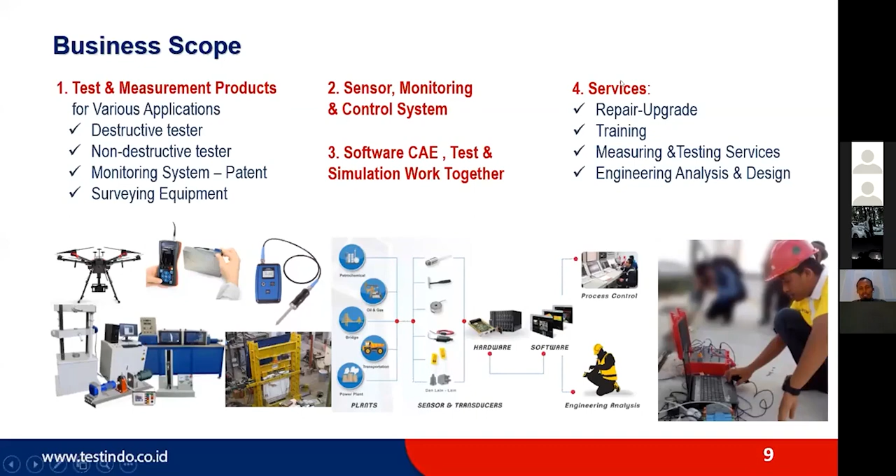Dan untuk services kita ada jasa untuk testing seperti produk laser scanner, non-destructive testing, dan juga kita ada analisis dan training. Dan kita juga banyak mensolusikan problem-problem struktur di Indonesia. Manpower kita ada civil engineering, ada instrument engineer sama mechanical engineering.

Nah, main market kita selama ini kita banyak di PU, memang di Bina Marga, di Kementerian Teknik, di balai-balai. Dan kami juga rutin mensupport komisi di Kementerian PU, Komisi Keselamatan Jembatan dan Terowongan Jalan, dan juga kita inisiator asosiasi untuk masyarakat monitoring kesehatan struktur Indonesia.

Sedangkan hubungan kami dengan ACS dan Leica ini, ACS adalah prinsipal dari Testindo, dan Leica kita adalah sistem integrator, kita provide solution untuk produk-produk Leica. Jadi beberapa customer Leica mungkin, Leica ini punya range produk cukup luas, kita engineer-nya yang support untuk integrasinya.

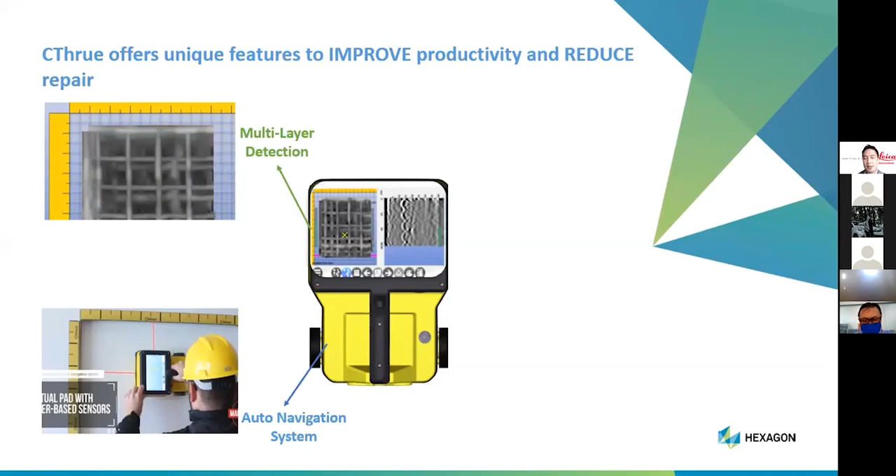Saya masuk ke fitur-fitur unggulan dari CThrue ini. Karena dual antena yang dimilikinya, ini visualisasi yang dapat diberikan oleh CThrue, jadi dia nggak hanya memberikan first layer atau second layer, bahkan dia memberikan sampai dengan layer-layer berikutnya yang di bawah. Lalu, dengan adanya automatic navigation system, kita nggak perlu lagi membuat grid pada saat kita mau melakukan grid scan, atau menggunakan kertas yang bergaris. Tapi dengan menggunakan virtual pad itu, kita dapat meningkatkan productivity kita bekerja, karena di sana akan diberikan guidance ke arah mana kita harus bergerak agar sejajar dengan gridnya.

Lalu apabila kita sudah melakukan scanning di area itu, dan kita besoknya atau 2 minggu lagi ada owner investigation contohnya, atau dengan konsultan perencana melakukan inspection, kita bisa membawa tablet tanpa perlu lagi membawa alat scannernya. Kita bawa tablet dan kita melihat hasil dari scanning kita itu real yang ada di lapangan dengan menggunakan tablet itu.

Fitur yang terakhir yaitu adalah embedded EM sensor atau electromagnetic sensor, di mana ini memungkinkan alat CThrue dalam mendeteksi adanya kabel listrik yang aktif. Jadi sangat memastikan apabila kita mau melakukan safety drilling dan kita ingin menghindari adanya luka pada kabel listrik kita yang aktif.

Untuk lebih jelas mengenai fitur utama, coba kita lihat mengenai multi-layer detection. Ini adalah tampilan layar CThrue pada saat kita melakukan data akuisisi. Dapat dilihat sebelah kiri ini adalah full screen dari layar monitornya CThrue. Ini bukan gabungan dari satu layar dan 2 layar, tapi ini adalah satu screen, dan dia menampilkan kiri dan kanan. Kirinya ini adalah deeper object yang dideteksi oleh dia, dan yang kanannya ini adalah shallow object yang dideteksi oleh dia. Deeper object dia akan memberikan informasi layer kedua sampai dengan layer-layer berikutnya yang ada di bawahnya itu dengan sangat jelas, tapi dia tidak memberikan informasi yang cukup jelas pada area-area atas. Tapi area-area atas diinformasikan kepada shallow object yang di sini. Jadi kita bisa mendapat 2 visualisasi pada saat yang bersamaan.

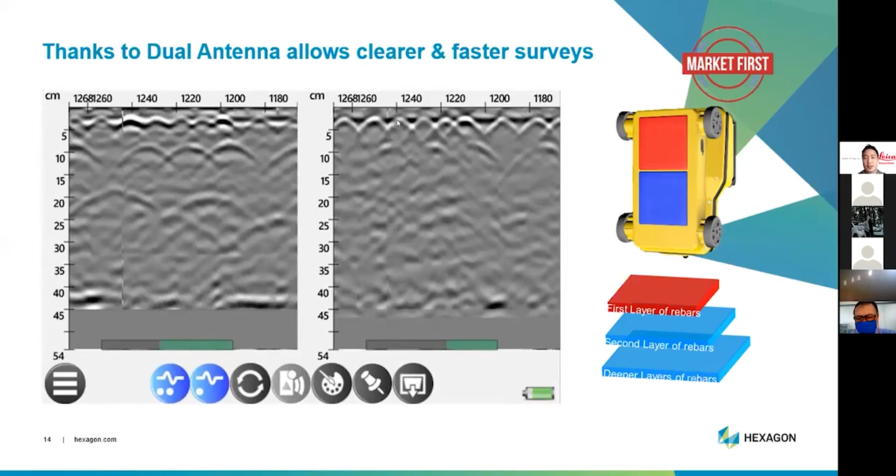Apabila kita melakukan grid scan, tampilannya yang dilihat seperti ini. Jadi kita dapat mengambil keputusan di area mana kita bisa melakukan safety drilling dan kita tidak menabrak besi, melukai besi, atau bahkan kita sampai memotong struktur bangunan yang ada di sana.

Contoh aplikasinya atau bagaimana kita menggunakan alat CThrue ini sendiri dapat dilihat di contoh berikut. Ini pada saat kita mau melakukan data acquisition, dan apabila kita mau mengintegrasikannya sampai dengan augmented reality, kita dapat menggunakan CThrue dengan virtual pad-nya sehingga kita dapat benefit, tidak perlu membuat grid terlebih dahulu, dia akan memberikan guidance kepada kita saat kita bekerja.

Lalu stiker ini akan berguna sebagai marking dan juga nantinya apabila Bapak Ibu balik ke lapangan dengan membawa tabletnya, cukup scan di area sana seperti barcode saja, kita dapat melihat hasil yang sudah kita scan sebelumnya dengan menggunakan alat scanner CThrue itu. Dan ini adalah gambar pada saat kita sudah melakukan data acquisition dan kita mau melakukan safety drilling. Di sini dapat dilihat dengan sangat jelas objek-objek yang tidak memiliki bentangan rebar, baik itu vertikal atau horizontal, adalah area yang tepat untuk kita lakukan safety drilling.

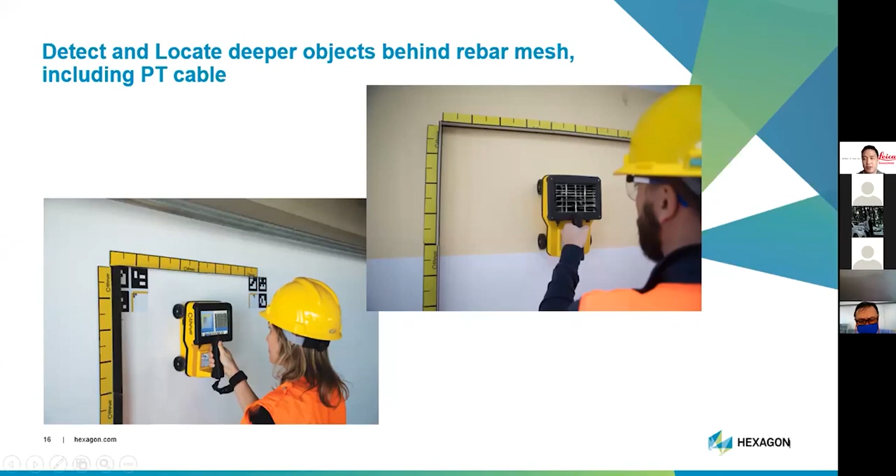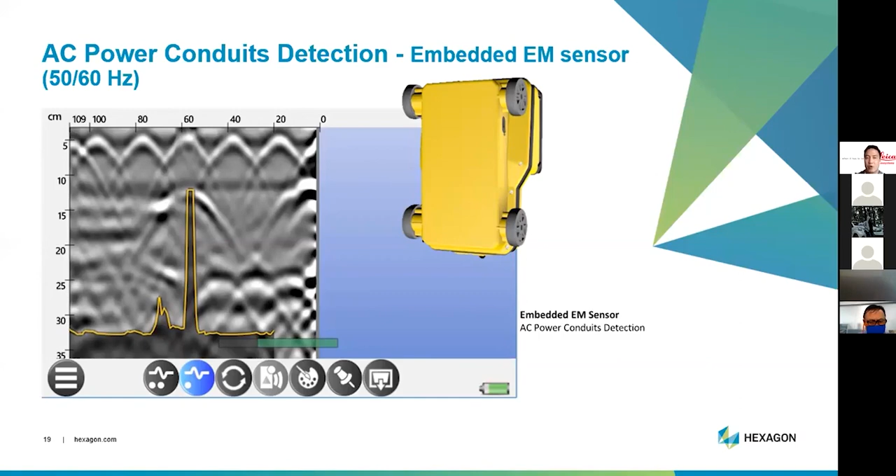Untuk embedded EM sensor itu sendiri, tampilannya adalah seperti ini. Jadi apabila kita mengaktifkan sensor ini, pada saat kita melakukan data akuisisi nanti akan bergerak apabila kita mendekati listrik yang bermuatan, itu akan bergerak kurvanya seperti itu, dan paling peak, paling atas itu mengindikasikan bahwa di area itu, di contoh ini adalah 60 cm dari inisial scanning area kita, itu ada suatu kabel listrik yang bermuatan dengan kedalaman sekitar 12,5 sampai dengan 13 cm. Selanjutnya kita bisa membuat marking di sana, dan juga setelah itu kita bisa menghindari area itu apabila kita tidak mau melukai kabel listrik tersebut.

Untuk fitur tambahan dari CThrue, apabila Bapak Ibu ingin melakukan investigasi di jembatan atau di area-area yang tinggi yang susah dicapai dengan tangan manusia, kita memiliki remote control di dalam stick ini, sehingga dapat menghubungkan dengan teman kita yang menggunakan tablet, sehingga beliau dapat melihat hasil scanning yang dilakukan oleh alat CThrue tersebut secara real di tablet.

Yang pertama yang perlu kita lakukan adalah kita membuat grid setup terlebih dahulu. Lalu setelah itu kita melakukan scanning atau data akuisisi vertikal dan horizontal di area yang kita bikin tadi.

Lalu dengan segera kita sudah mendapatkan hasil dari area yang kita akuisisi itu. Apabila Bapak Ibu hanya ingin melakukan safety drilling, contohnya, atau mau melakukan inspeksi di lapangan, di site, cukup berhenti sampai dengan tahapan mendapatkan result. Setelah itu bisa mengambil keputusan di sana, di saat itu juga.

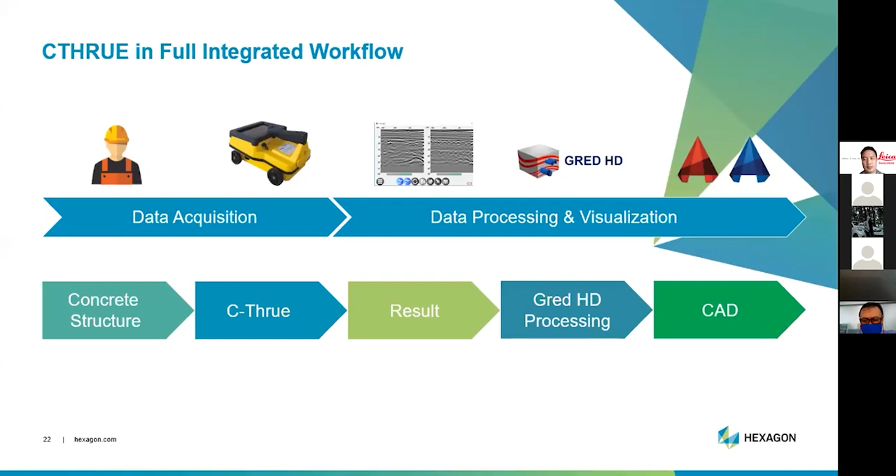Atau bahkan kalau misalkan Bapak Ibu ingin memindahkan hasil scanningnya itu ke berbagai macam drawing file, kita support dengan adanya software. Di tengah-tengahnya itu ada software GRED HD yang akan saya jelaskan nanti, seperti apa previewnya. Software ini akan membantu membuat hasil yang diberikan oleh si alat menjadi tampilan 3D, dan juga nanti kita bisa mengekspornya ke CAD drawing dan GIS file. Ini adalah preview sedikit tentang software GRED HD itu sendiri.

Jadi dari data yang kita akuisisi di lapangan, kita ekspor ke PC atau desktop kita yang memiliki software GRED HD ini. Lalu setelah itu kita melakukan post processing selanjutnya di sini, dan pada akhirnya kita bisa mendapatkan tampilan 3D dan kita bisa pindahkan ke CAD atau GIS.

Untuk lebih jelas kepada Bapak mengenai full CThrue workflow ini, saya akan sharing suatu video untuk memperlihatkan bagaimana CThrue ini bekerja sampai dengan tahap akhirnya dan hasilnya seperti apa. Silakan dilihat.

Tentunya main application-nya cuma dua tadi, yaitu inspection dan safety drilling. Dan ini beberapa adalah contoh-contoh aplikasi yang saya bisa share hari ini kepada Bapak Ibu.

Yang pertama adalah as-built check. Pada umumnya apabila kita memiliki bangunan-bangunan lama yang mau kita melakukan renovasi atau perkuatan, sangat tepat kita menggunakan solusi dari sini. Contoh di sini adalah suatu jembatan yang ada di Itali, dibangun sewaktu Perang Dunia Kedua. Dia sudah memiliki drawing, untungnya, dan dia mau mengecek apakah dengan struktur bangunan yang seperti ini bentuknya masih layak digunakan dan konfigurasi yang ada masih sesuai dengan drawing awal atau tidak.

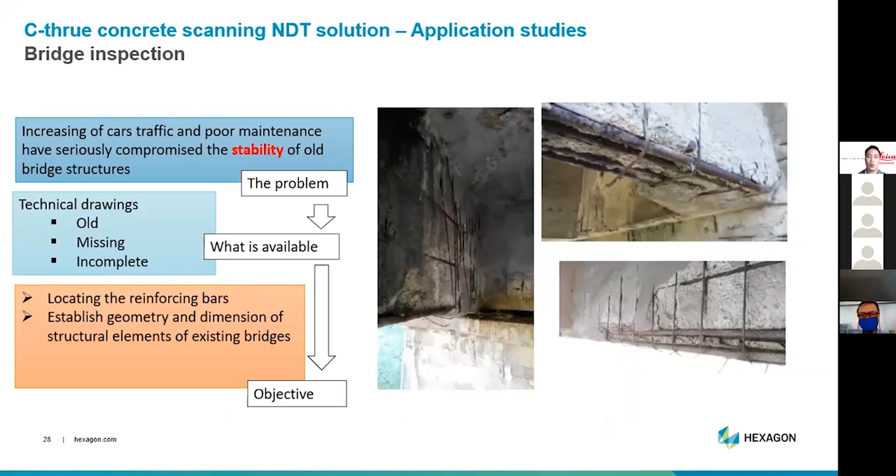Yang dilakukan setelah dia selesai drawing, kalau Bapak Ibu lihat di gambar awal, kita bagi per subsegmen, jadi P1 sampai dengan P8, masing-masing gambar dari hasil scanning itu kita cocokkan kepada gambar, dan hasil scanning itu menunjukkan bahwa hasilnya masih sesuai dengan aktual yang ada di lapangan.

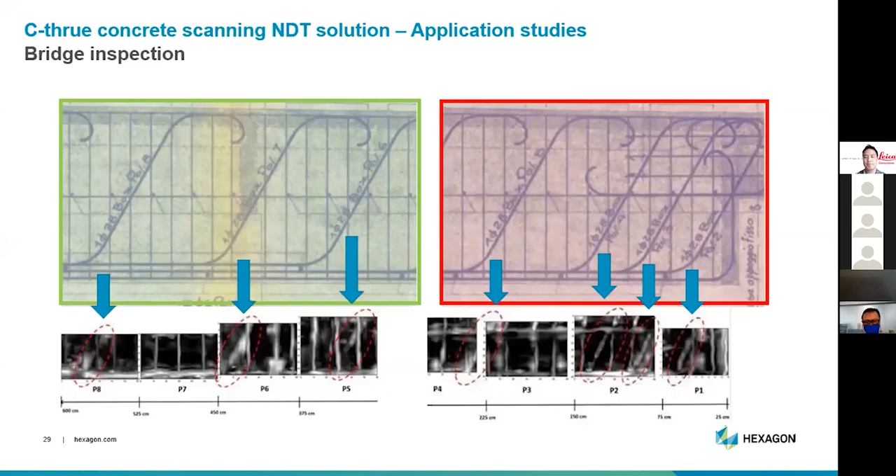Contoh selanjutnya, atau main application selanjutnya, tentunya adalah rebar detection. Apabila kita mau melakukan investigasi untuk bangunan kolom, misalkan bangunan lama kita atau pada perubahan fungsi bangunan, kita ingin melakukan pembesaran kolom, kita bisa melakukan investigasi terlebih dahulu struktur bangunan seperti apa apabila kita tidak memiliki blueprint. Atau kalau misalnya kita mau melakukan safety drilling atau coring, kita juga bisa menggunakan solusi dari Leica ini.

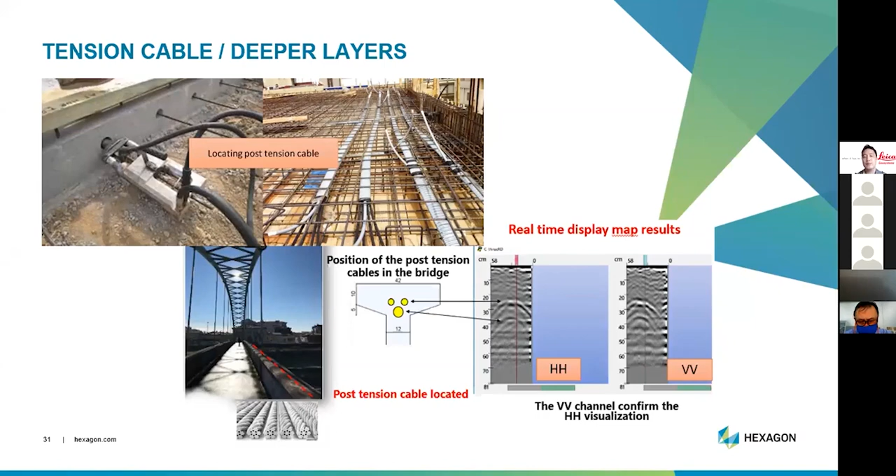Yang selanjutnya, contoh yang cukup menarik, apabila Bapak Ibu ingin melakukan investigasi suatu jembatan dan posisi dari post tension-nya itu dibentang atau digelar secara horizontal sejajar dengan jembatannya, dan dia berada di atas dari rebar. Pada contoh ini, jembatannya cukup ramai dilalui oleh kendaraan, dan kita mau melihat visualisasinya dari bawah.

Dan dari visualisasi dengan C-thrue, kita memberikan dua informasi karena dual antena polarization tersebut, kita dapat mendapatkan informasi tentang objek yang shallow dan yang deep seperti apa. Sehingga dengan demikian kita dapat melakukan interpretasi data yang dibaca, apakah itu rebar atau post tension cable.

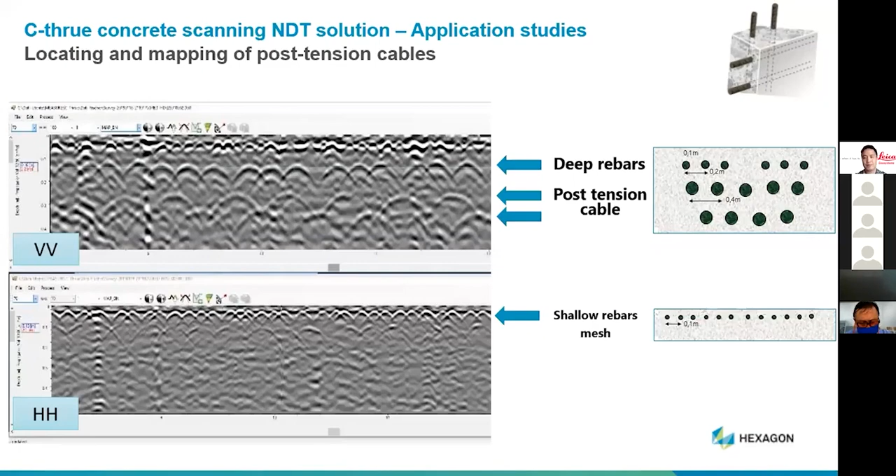Dan ini adalah contoh apabila kita mau melakukan safety drilling atau safety coring. Tentunya fitur utama adalah multi-layer interpretation, kita dapat melihat di lapangan dan melakukan marking di area-area mana yang tidak memiliki besi, sehingga kita memastikan tidak merusak besi tulangan yang ada di dalam beton.

Lalu selanjutnya fitur atau aplikasi terakhir yang bisa saya sharing hari ini adalah apabila sewaktu melakukan scanning, kita menemukan adanya suatu anomali. Anomali ini dapat kita detect secara otomatis dengan menggunakan tombol pin ini. Kita klik di sini, lalu kita arahkan kepada hiperbola tersebut, dan nanti akan memberikan informasi, kalau warnanya hijau seperti di gambar itu adalah void.

Sehingga apabila beton yang dideteksi itu memiliki rongga—bukan rongga-rongga kecil atau crack kecil, tapi rongga yang cukup besar—itu bisa diinformasikan kepada Bapak Ibu sewaktu melakukan scanning dengan menggunakan alat C-thrue.

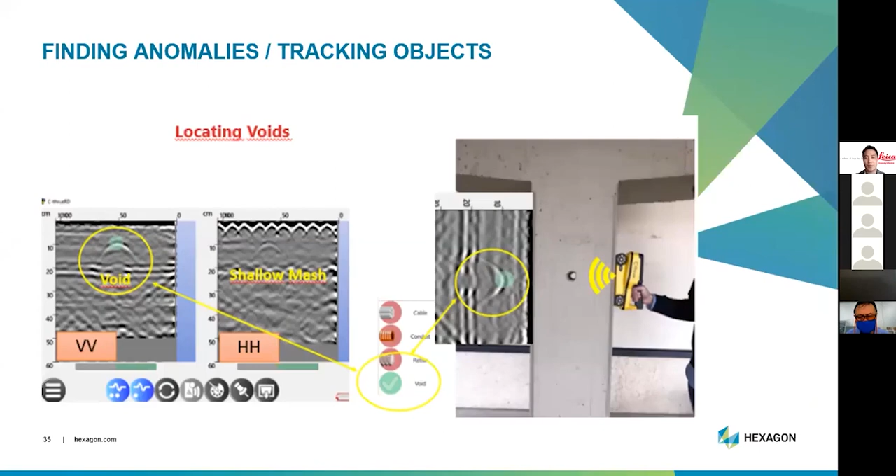Oke, saya sudah sampai di akhir slide presentasi saya hari ini, Bapak Ibu. Cukup padat, cukup singkat presentasi dari saya, karena waktunya pun juga cukup singkat. Semoga Bapak Ibu melihat benefit yang bisa diperoleh dengan menggunakan solusi dari kami. Untuk mengakhiri, izinkan saya untuk merecall atau merecap beberapa fitur yang dimiliki oleh alat ini.

Kita menawarkan 3 first teknologi yang ada di market. Yang pertama, dengan adanya dual antena polarization, kita bisa mendapatkan visualisasi multi-layers yang ada di dalam suatu struktur bangunan. Lalu kita tidak perlu lagi menggunakan garis yang full.

Atau kita menggunakan kertas yang memiliki garis. Kita cukup melakukan dengan menggunakan virtual pad, dan kita bisa mendapatkan guidance ke arah mana kita bergerak di area itu.

Lalu juga dengan augmented reality, kapanpun kita melakukan investigasi atau inspection bersama dengan stakeholders yang lain, kita cukup membawa tablet dan kembali ke lapangan melihat area yang sudah kita scan dengan menggunakan tablet, sehingga pengambilan keputusan, contohnya di area yang kritikal, bersama dengan stakeholders yang lainnya itu dapat berlangsung dengan cepat dan sangat objektif.

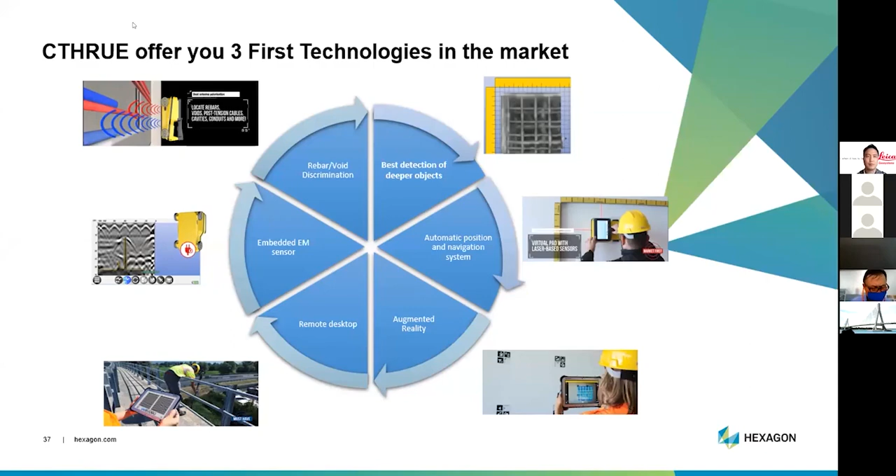My name is Andrey Bulavinov. I'm a CEO and Managing Director of ACS Germany. First, I will start with the introduction of the ACS group. ACS means Acoustic Control Systems, and from the name itself you see that we are concentrated on acoustic or ultrasonic testing methods.

A few words about the company. ACS has been started nearly 30 years back, and nowadays it is an international provider of UT equipment and inspection services as well, with about 160 employees and all in-house development and production of ultrasonic transducers, electronics, mechanics, software. We consider ourselves as pioneers in three-dimensional ultrasonic imaging, which I will exemplify in scope of my presentation.

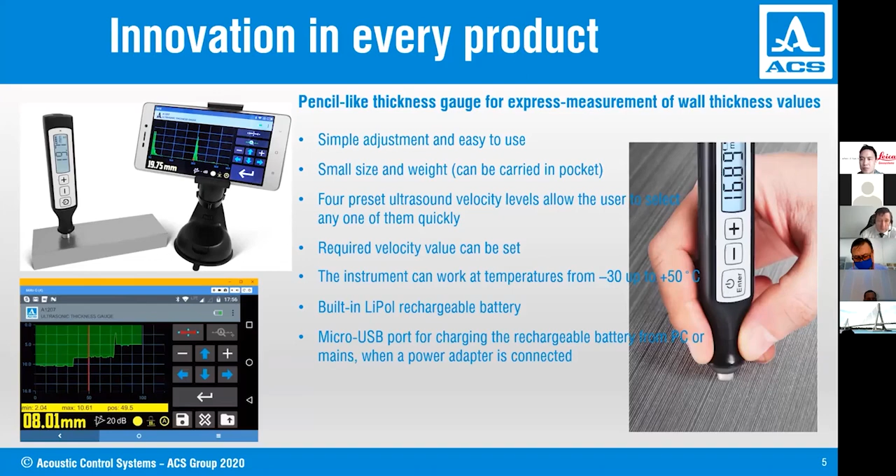A few products to indicate the novelty and innovation of ACS Group. For example, this is the world's smallest wall thickness gauge, with only 40 gram weight and direct link to the smartphone or tablet PC. Very easy to use and a fancy instrument with unique features, obviously. Then we have the EMAT thickness gauge.

People who are involved in UT, they know what is EMAT. It is another method to generate and receive ultrasonic waves. Opposite to other instruments available on the market, we don't use permanent magnets in our EMAT thickness gauge, implementing pulse magnetization, so that the instrument has a very unique feature. It is not sticking on the surface, meaning you really can scan and also obtain the B-scan, for example, without couplant.

There is a special version of this unit for working on high temperatures, up to 800 to 900 degrees Celsius. So the next one, very briefly, it is the world's smallest TFM, total focusing method, phased array instrument, which can be really held in one hand only, and at the same time can be connected to a small pipe scanner, so that two-dimensional and three-dimensional imaging is possible with very teeny dimensions of the unit.

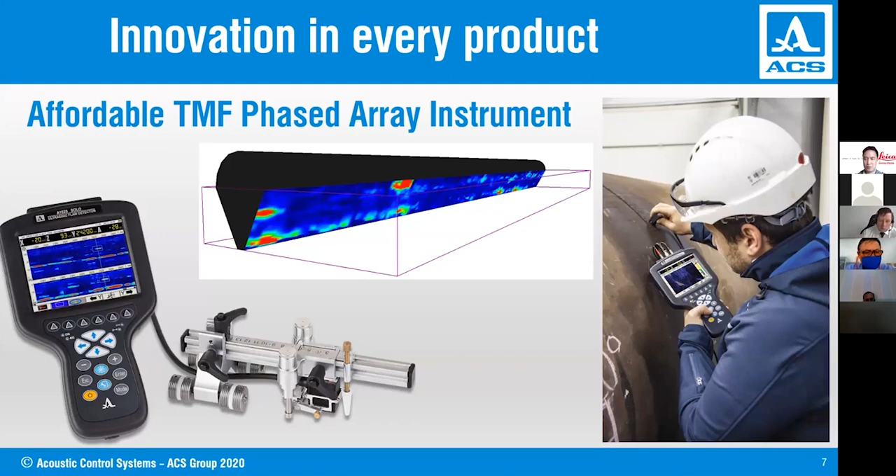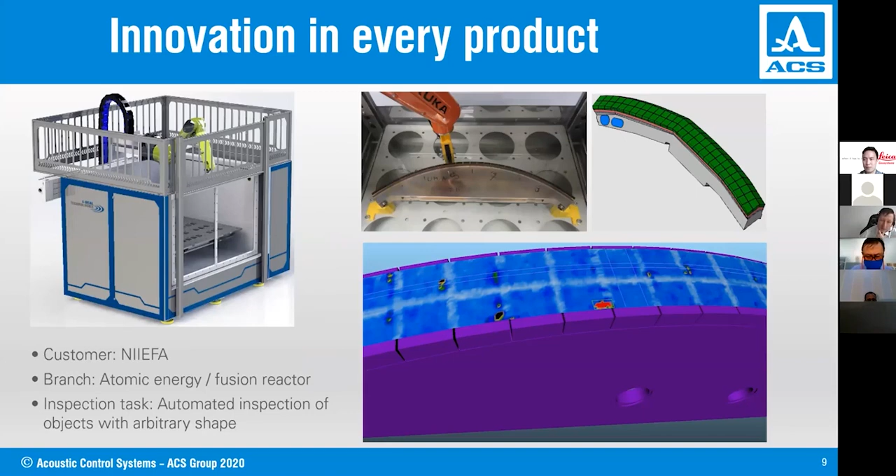Another instrument is again a high-end machine for ultrasonic testing of complex shaped parts by using articulated robots, with the functionality of two-dimensional and three-dimensional imaging directly on the CAD model of the component, with fully automatic detection and sizing of the material flaws. Another machine is an automated inspection setup for testing fuel tanks of rockets, which has been developed for the European EADS concern.

It is also a quite unique machine capable of three-dimensional imaging of really large objects, like a fuel tank made of carbon fiber, which is a lightweight material.

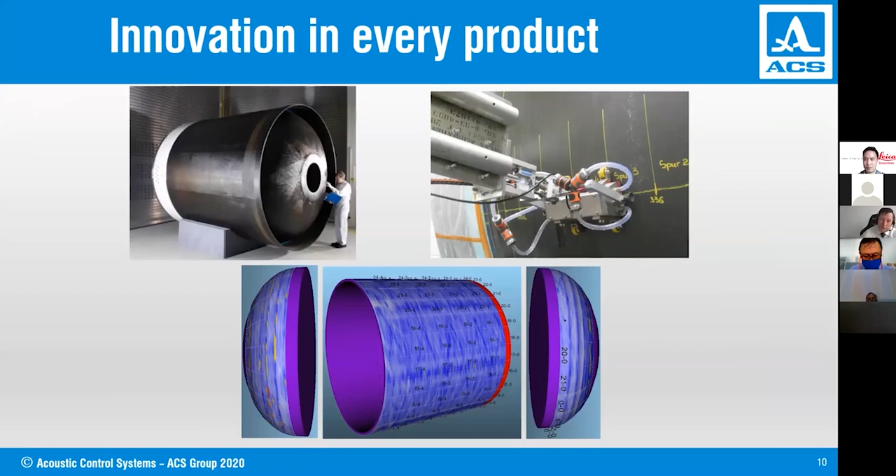Here I am at the end of the introduction of the ACS group. If you have any questions apart from concrete testing, we can discuss it later, or maybe make another session. But now I'm coming to the actual topic of the webinar, and we'll talk about concrete testing in civil engineering - about the state of the art and available instrumentation for this purpose.

Generally speaking about what can be done by using UT, ultrasonic testing, in civil engineering - yes, we can collect data about the inner structure of the object. We can estimate the current state of the building or construction, and we can find and estimate the level of damages, material voids, and evaluate material flaws that appear during construction or during exploitation.

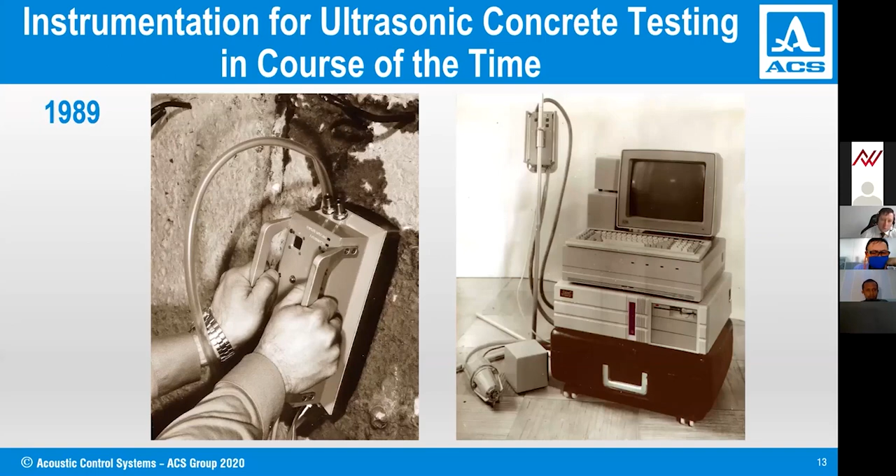ACS is obviously a pioneer in this field, especially if we talk about 2D and 3D imaging. The history started long back, and in the course of time the instruments have significantly changed. Nowadays you will see that these are very modern units with 3D imaging and evaluation of the inspection results available in the package.

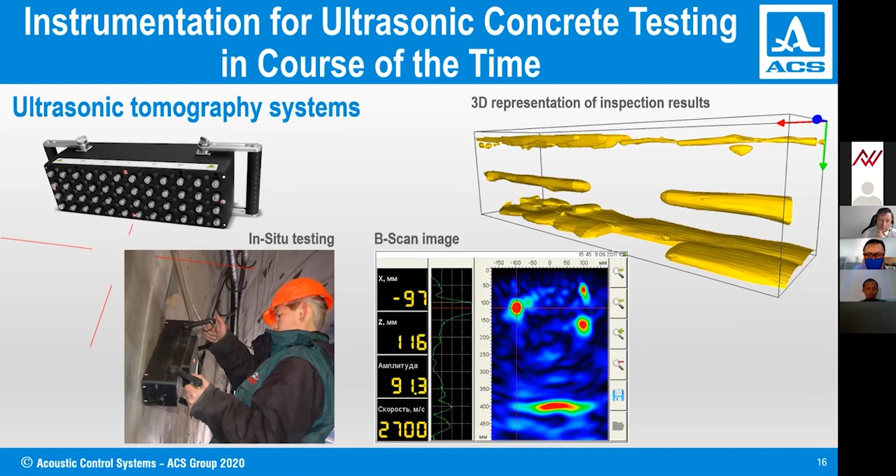But if we talk not only about the advantages, but rather about the challenges of UT on concrete, we should be very clear. There are basic limitations, and they are of two natures. The first group we can call physical limitations. For example, concrete is a very heterogeneous material with strong structural noise, and it is structurally complex.

It contains reinforcement rebars, tendon ducts, channels, and so on inside of the construction. We have to deal with the large dimensions of the objects, and sometimes it has limited accessibility. So all of this, of course, makes the life of the operator hard.

But another group of limitations - if you look at regular metal testing, we have three basics which help very much to perform. First of all, these are codes for instrumentation. Second, these are codes for personnel qualification. And third, these are codes and standards for actually performing on particular objects, like codes for weld inspection, forging inspection, or casting inspection, inspection of casting parts or carbon fiber.

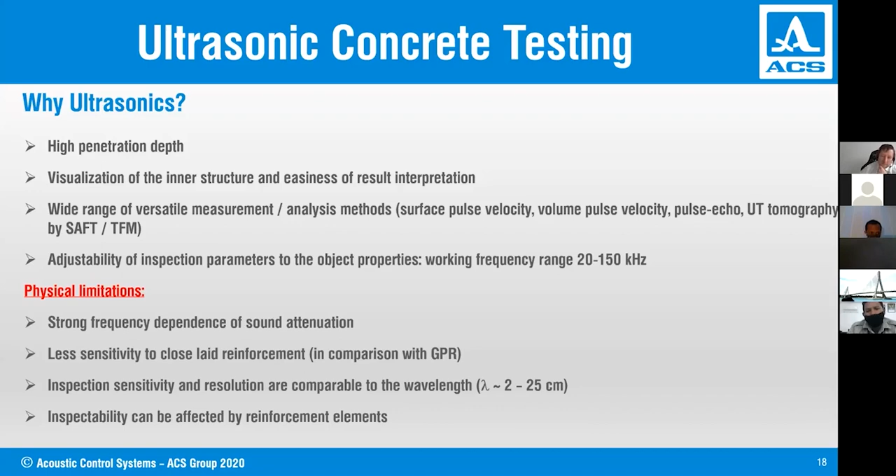And inspectability, especially if we talk about void detection, is very much affected by the presence of reinforcements inside of those components to be inspected.

So coming to the instrumentation, the key element of modern ultrasonic equipment is the so-called dry point contact transducers, DPC. We are proud to mention that ACS was the inventor of this technology. Those transducers can be configured and built in very different configurations with different frequencies.

But the basic thing to know is that by means of these pins vibrating on the surface, transducers are capable of generating either shear waves or longitudinal waves, and both of them can be applied for different applications, and as I mentioned, in a different frequency range.

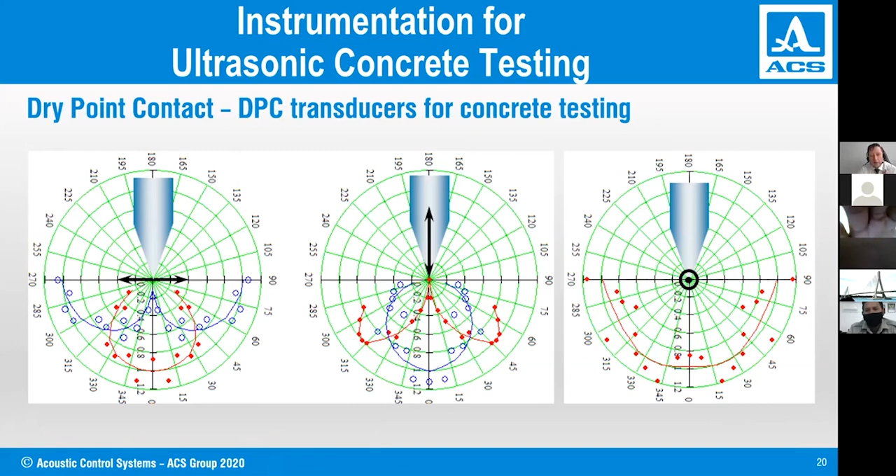Typically transducers have a very wide beam opening, predestined for tomographic processing of the ultrasonic data. Also, we very rarely use single pin or single element transducers due to limited penetration depth. Normally they are combined in different configurations of transducer arrays, used as a single aperture transducer, double aperture transducer, or phased array transducer, depending on the particular application.

The functionality of those instruments for ultrasonic testing of concrete can be subdivided roughly into 3 groups. First of all, these are ultrasonic pulse velocity testers, UPVT instruments. There are very many, this is a very widely applied technique, and it is quite simple to use. There are codes also on how to perform on site and obtain the proper results. Then the second group, these are single channel flaw detectors or thickness gauges, depending. And there are multi-channel tomography systems for imaging, like our MIRA instrument.

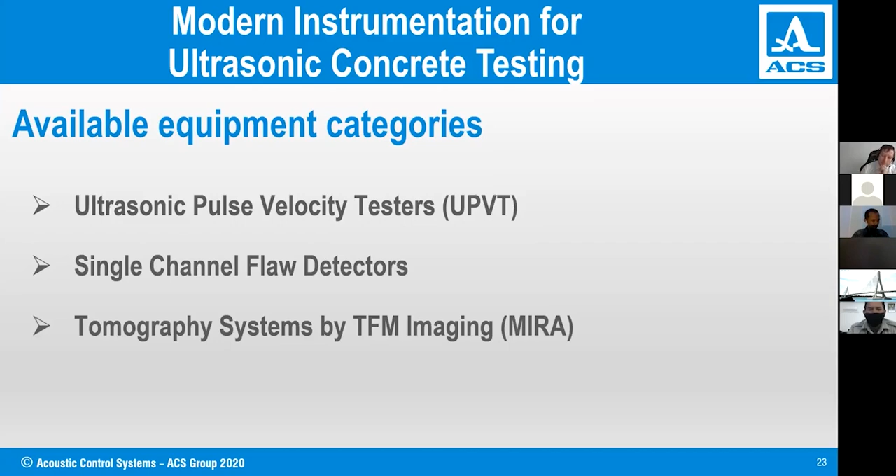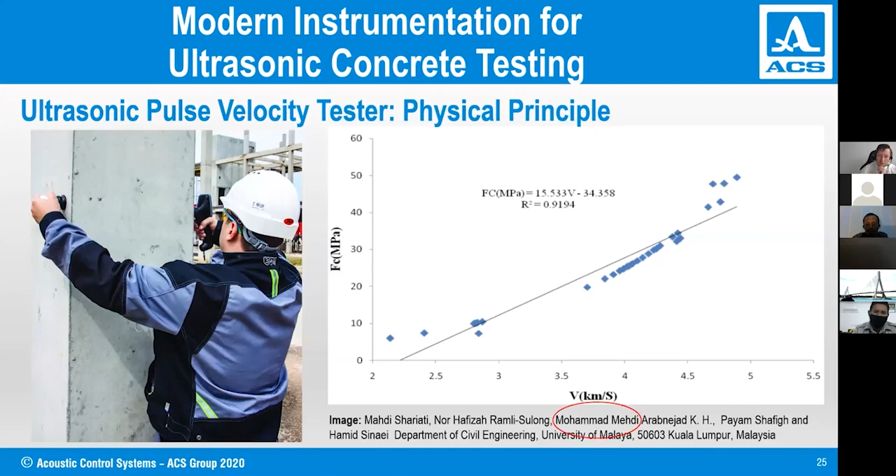UPVT testing is, as I've told, rather simple. By principle, we just measure the propagation time between the transmitter and receiver. By knowing the thickness of the component, we can calculate the sound velocity. The sound velocity correlates to compressive strength of the material, which is the basic mechanical characteristic for concrete. This dependency is general, but if we want to measure the compressive strength of concrete directly in megapascals, it needs calibration, because ultrasonic testing is never a direct measurement method, it is always an indirect measurement method. In all cases, we have to convert the UT values into mechanical values.

For example, if we are in a position to create calibration blocks of the same concrete type but with different mechanical characteristics, we can measure its mechanical properties and ultrasonic properties and their correspondence to each other. By having this curve, which can be saved in the instrument, we can directly indicate the mechanical property like compressive strength on the screen of the instrument.

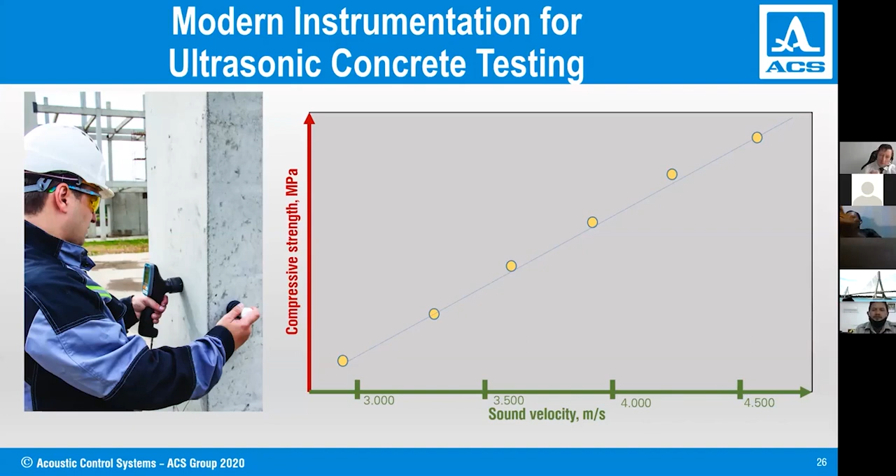There are different modes of measurement: so-called direct through transmission, semi-direct through transmission by side, by receiving the ultrasonic waves on site, and surface through transmission method. All those 3 methods are implemented, for example, in our A1410 Pulsar, which is a couplant-free UPVT instrument with up to 3 meters, sometimes even more, thickness penetration capability.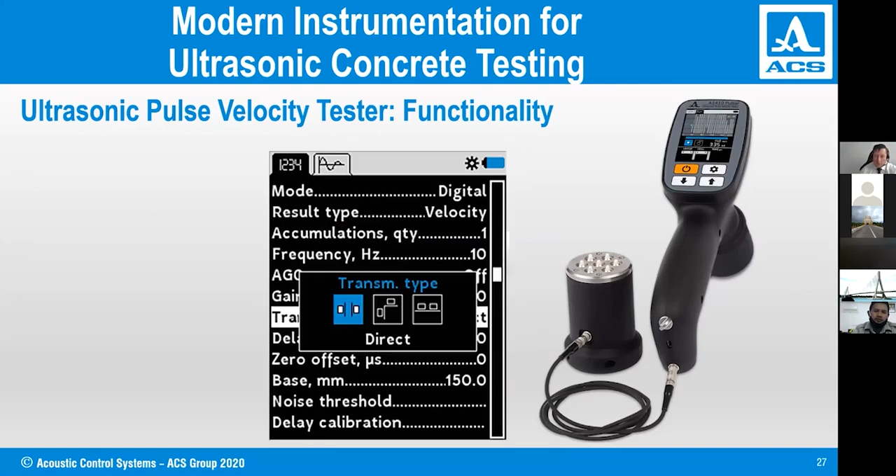It also has a nice feature - Bluetooth link to the smartphone. Thus we can perform some evaluations, for example like the SONREB method, by using a smartphone or tablet PC.

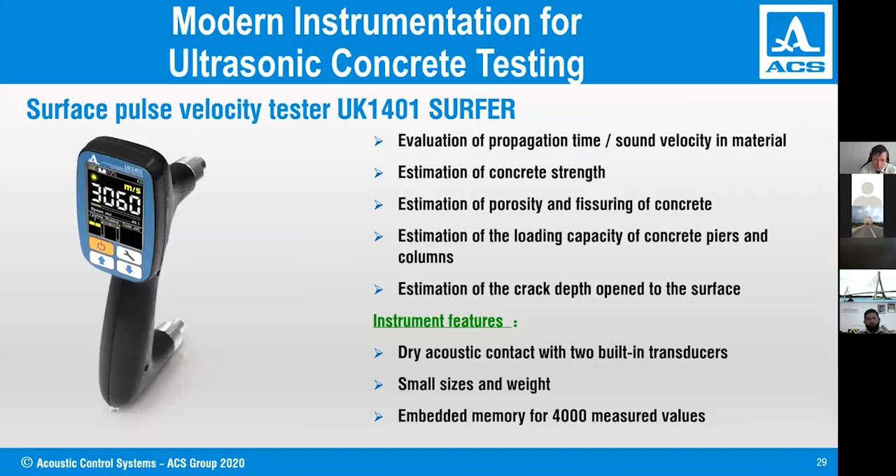There is a simplified version of the same instrument if you only want to measure the surface pulse velocity. The UK 1401 Pulse Surfer can be used. It implements a slightly simplified principle. We have only two transducers with a fixed base, and it measures only the sound velocity between these two pins, and the distance is fixed so that the evaluation is much faster and more simple.

The next group of instruments I mentioned before, these are single channel ultrasonic thickness gauges and flaw detectors. The principle is as with any flaw detector - we generate sound by one-side access and receive echo signals at the same point, and by evaluating the backwall signal we obtain the thickness information, having the sound velocity value, or if we have some indication between the backwall signal and transmitter pulse, we can detect larger voids.

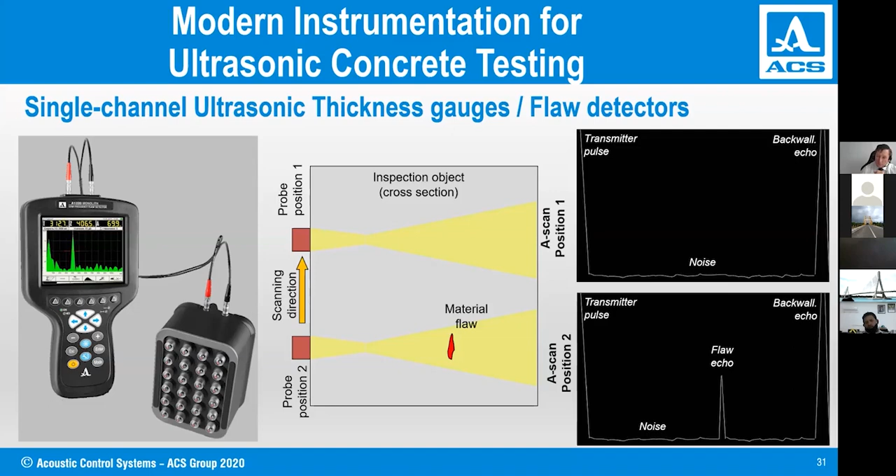The instrument has a so-called map mode, meaning before the inspection we can define a two-dimensional map with a certain amount of X and Y values in scan direction and index direction, as we call it. By collecting the data in the map mode, point by point, we can obtain a three-dimensional data set which can be visualized offline by using the data evaluation software.

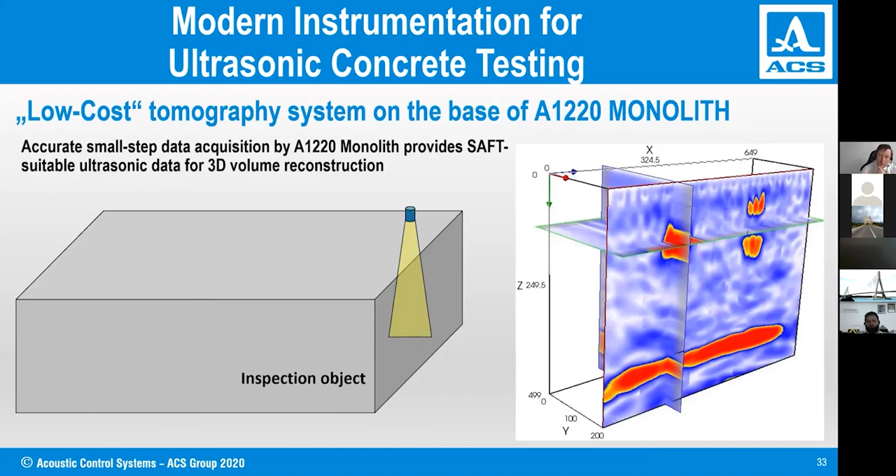Opposite to Monolith, which is a single channel instrument, A1040 MIRA, as a high-end tomography system, has not one but many UT data acquisition channels, and by collecting data in TFM mode, meaning by pulsing and receiving with the neighbor elements, which is indicated here - I don't know how fast my screen will be on your screen, but we pulse each element one by one and collect the data in a sequence.

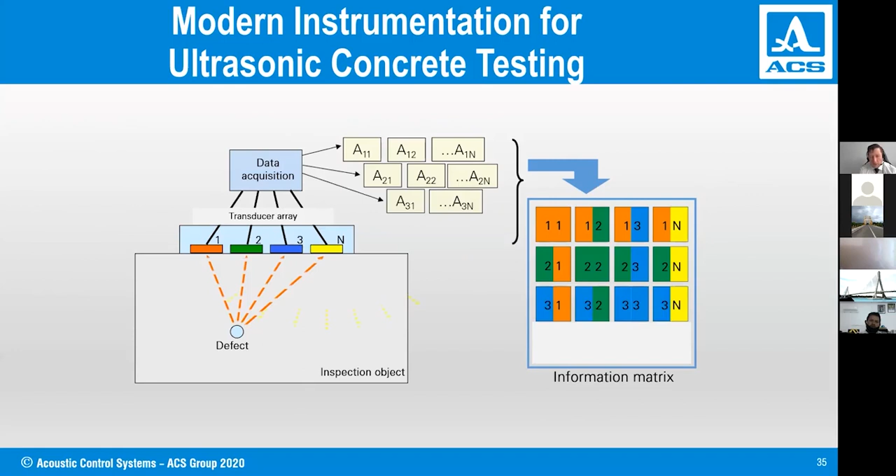By using this data set, we can reconstruct the cross-sectional image and visualize it - like, if you have kids and visit the doctor to look at the baby, it's basically the same principle. We obtain the cross-sectional image of the construction with available rebars or voids inside.

The basics about the physics is that the resolution capability of this instrument is always a function of the wavelength.

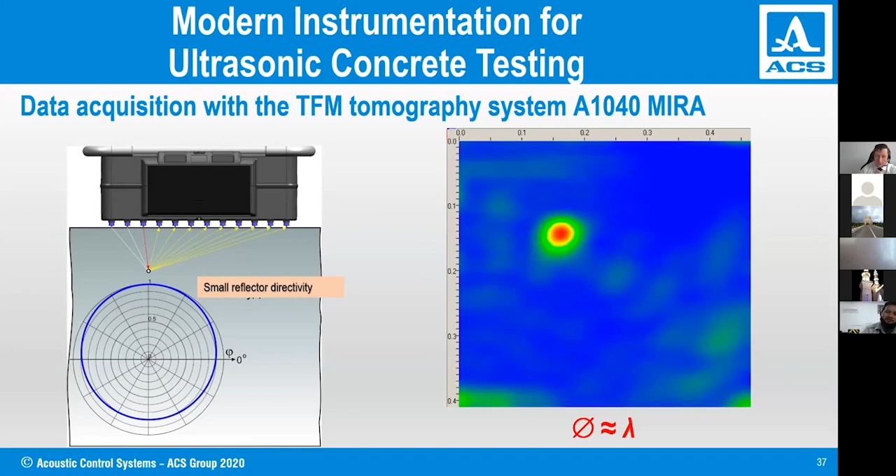For example, here on this image, we can see very nicely that reflectors with different dimensions, as a diameter, may generate indications which are different in intensity, but they have rather the same dimension. If we measure the dimension of the indication, it is quite the same because it is defined by the wavelength of UT only. This limitation should be understood very well while applying this technique on site. But in general, we'll go back one slide.

By using UT, we can visualize the internal life of the construction, like for example on this very nice reference block, where we can visualize what is inside of the concrete by just one side access.

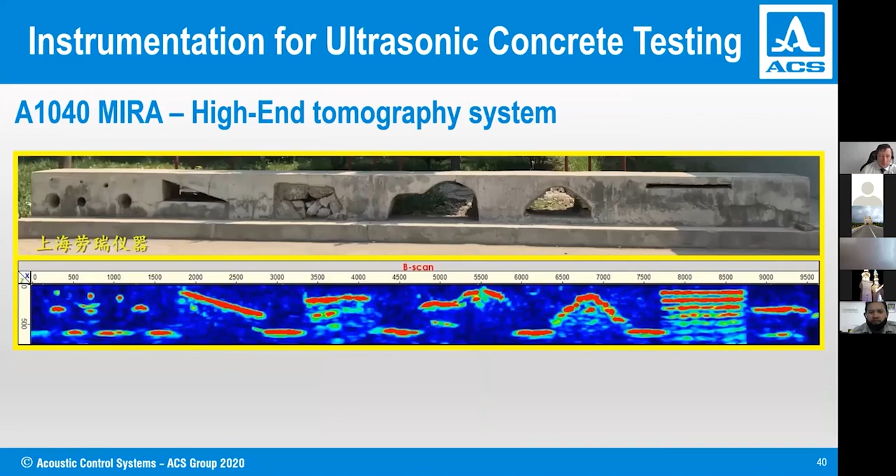In general, the testing performed by Mira is performed also in so-called map mode. So we collect the data in different locations of the construction and visualize them either directly as a cross-sectional image, or afterwards in the data evaluation software as a two-dimensional or three-dimensional imaging.

It is not very easy to say, because the most frequent question people ask is: what is the smallest defect which can be found? It is always a function of your material, more or less. If we don't need to penetrate too deep, and if the material is fine grain concrete, we can apply higher frequencies and obtain better detectability and better resolution. But if it is a thick component, or it has high attenuation because it is a coarse grain concrete, we are forced to reduce our inspection frequency, and it will obviously reduce our sensitivity and resolution.

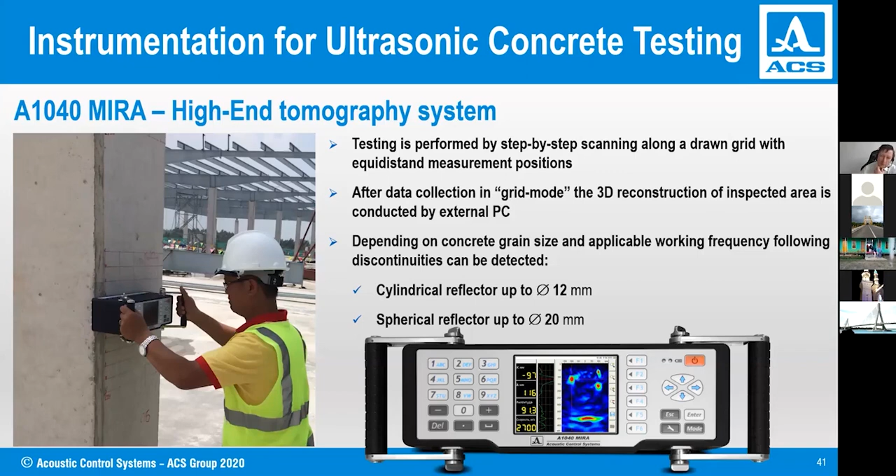Another important point: the most valuable results can be obtained if we collect the data over larger areas and put them together in our evaluation software. The evaluation software is available with the instrument; it is part of the delivery set.

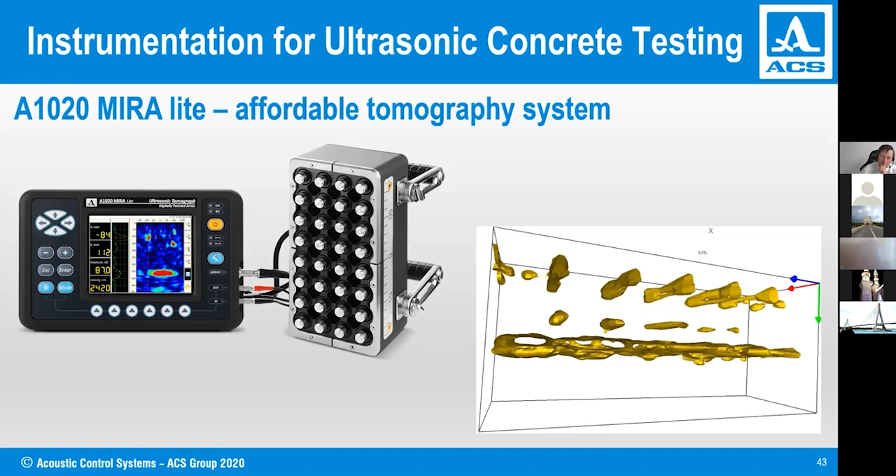The Mira, as I have told already, is a high-end instrument, rather expensive, but there is a small brother, a light version of Mira, so-called Mira lite. It has lower penetration depth because of smaller aperture, but in very many cases it is sufficient if we don't need to penetrate, say, 1 or 2 meters of concrete. This is also a very nice and rather affordable instrument with similar functionality to the big 1040 Mira. As you see here, for example, it is also capable of detecting several layers of rebars and three-dimensional imaging.

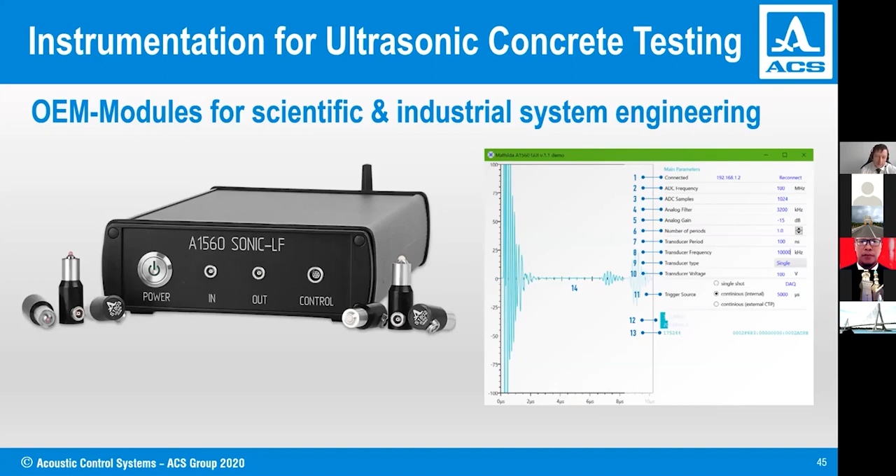So now let's come to the applications - how to use ultrasonics on site, and what are actually the tasks that can be solved by the instruments which I have presented previously. The very basic and main application is obviously thickness measurement.

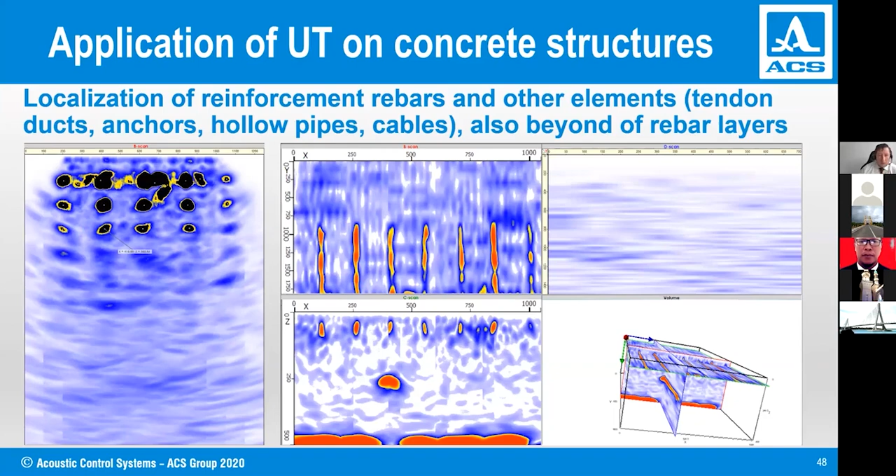Another major application apart from the first two is detection of material voids and estimation of their position and size, if possible in 3D. Detection of cracks, inclusions, or honeycombs.

Obviously this is not an easygoing issue. For example, if we have a crack which is not opened, which is inside the material, in very many cases no technique, neither UT, X-ray, nor GPR is capable of finding it if the orientation of the crack is not suitable, by having just one side access. So in very many cases you need a lot of experience to be able to catch it, to find the proper location of the instrument, and really be able to evaluate the ultrasonic data obtained.

But if the crack is opened and you only have to evaluate the depth of the crack, there is a technique to detect a crack tip and measure the thickness, to measure the location of this crack tip and the depth, which I will show a little bit later.

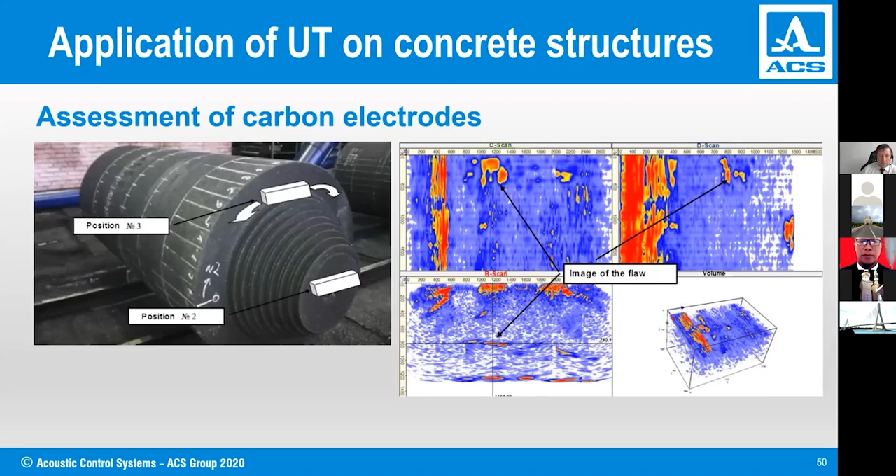I will also show some advanced application fields, or emerging applications which are just coming into the picture. Here I will show you a short video about grouting couplers.

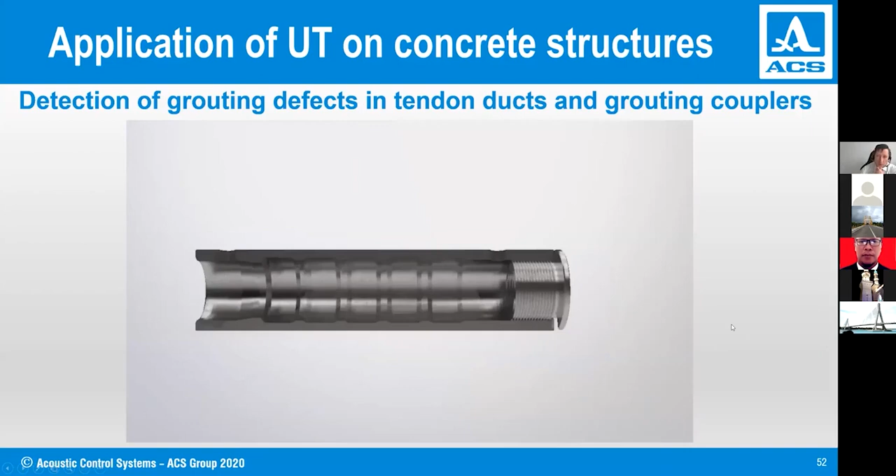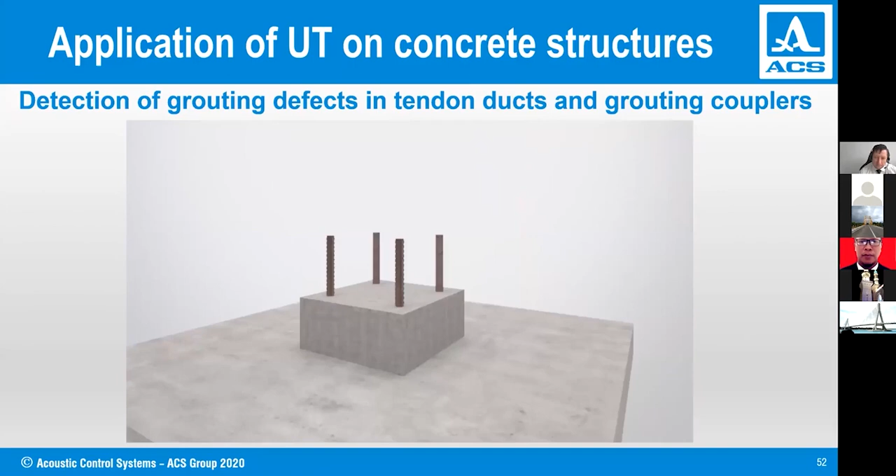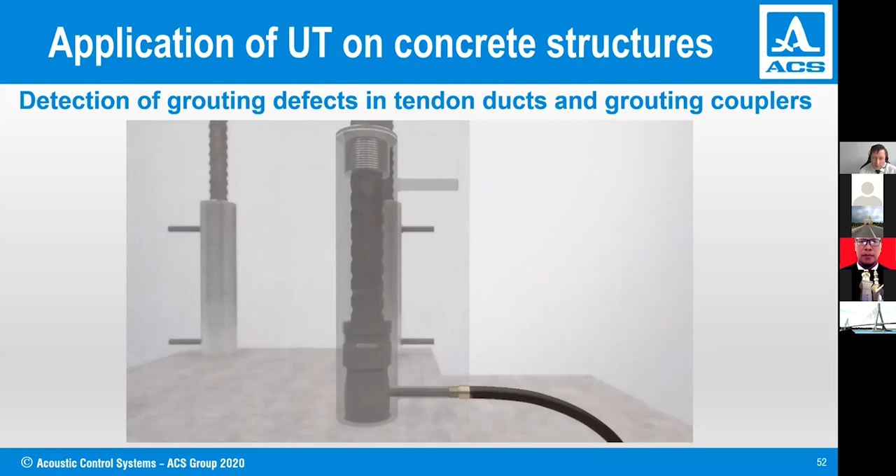This is a revolutionary technology in precasting, using precast concrete, where rigid blocks are connected to each other on site. They are pre-produced at the plant, and then they are just brought to the site, and they're connected to each other by using those grouting couplers. So this is the key element.

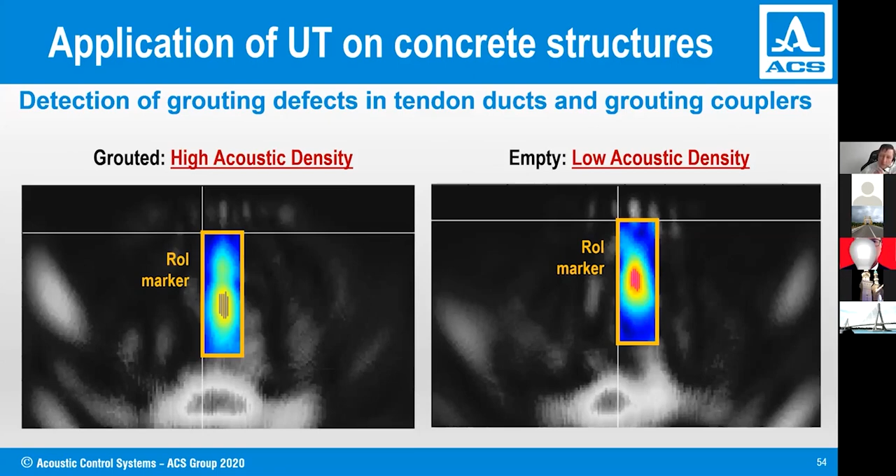These grouting couplers must be filled with the grouting mass, and it is a big issue whether it is filled well or not. By having just one side access, it is in many cases difficult to estimate. We have developed, or we are just about to develop, a technique to detect how well those couplers are filled with the grouting mass. This technique is called acoustic density. It has just been patented worldwide, and we think it will also be a very nice application. It doesn't just use directly the amplitude information, but also the phase information of the ultrasonic signals, where we can distinguish between a well-filled coupler and a badly-filled coupler.

Another application getting more and more popular, for example in China, is in constructing tunnels. If you know a little bit about the technology, the space behind the tunnel must also be filled with a kind of grouting mass, and the quality of this filling is a very important issue, because if there are empty spaces inside and the tunnel is under exploitation in service, vibrations are always happening, since the train is traveling inside the tunnel.

So in scope of time it can become very critical for the whole tunnel, for the whole construction. It is a very important issue to inspect how well this empty space is filled with the grouting mass. UT is also one of the most suitable techniques for that, where we just evaluate the strength of the backwall signal reflected from the interface between the tunnel wall and the grouting mass.

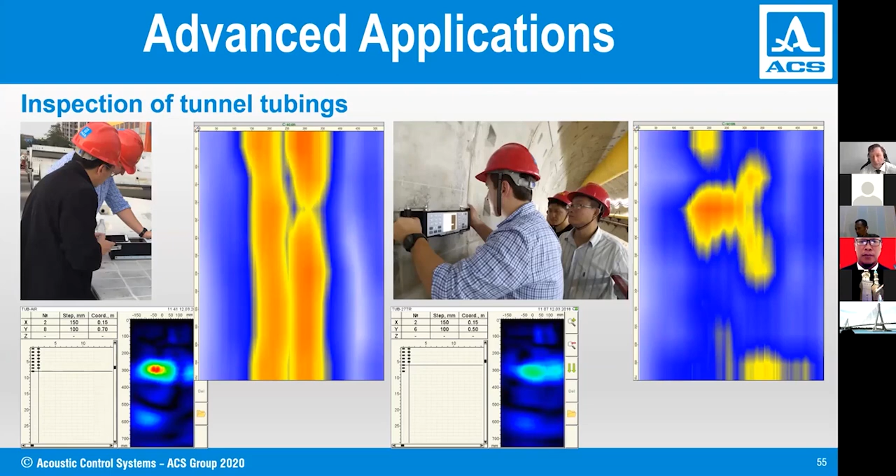So, a few novel trends in the ultrasonic imaging of concrete structures.

By its nature, the DPC transducers are matrix arrays. But in the systems available on the market now, including our MIRA, it is used as a linear array, meaning groups of 4 elements are switched together so that they're acting as one transducer.

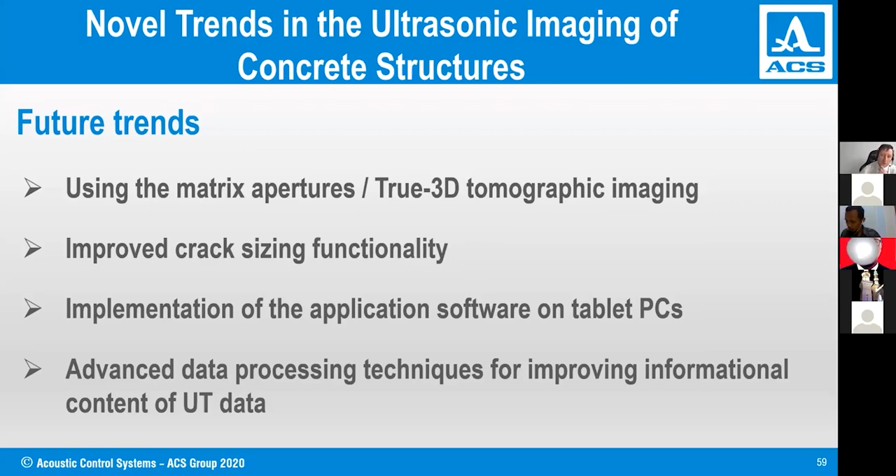In the advanced approach, where we can address each element independently and collect the data from each element independently, we can implement so-called 3D TFM, or true 3D tomography at each position of the instrument. This gives many advantages, like improved crack sizing, crack detection and sizing functionality, advanced data processing techniques for improving the informational content, and improving the detectability and resolution of ultrasonic testing. I will show you a short movie.

This is A1040 MIRA Neo, which will become available in the autumn of this year. We plan the sales start by October 2020. I will comment a little bit on this video.

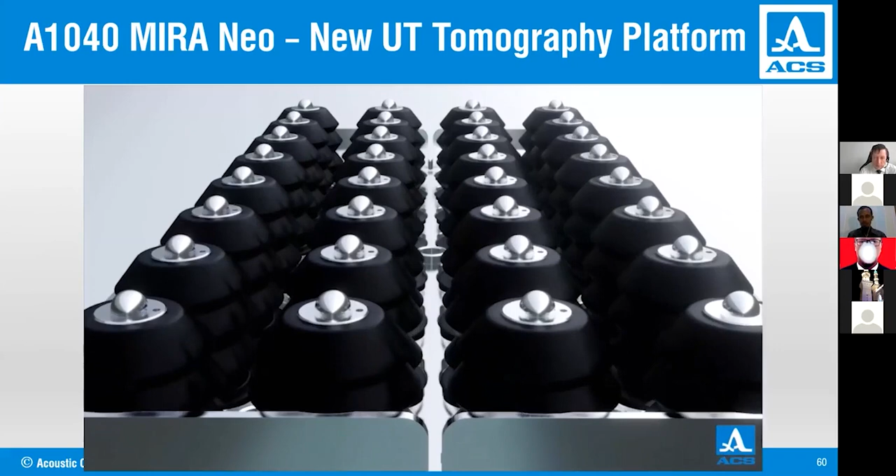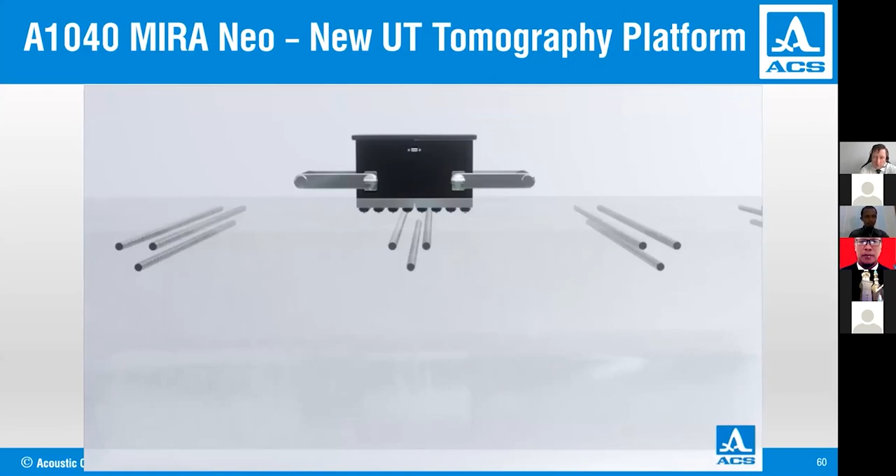The same dry point contact transducers are used for sound generation, but opposite to our current MIRA, we integrate a complete pulse receiver unit inside of each transducer. So it is an absolutely independent ultrasonic data acquisition unit, and by using this technology, we are capable to perform 3-dimensional matrix capture data acquisition.

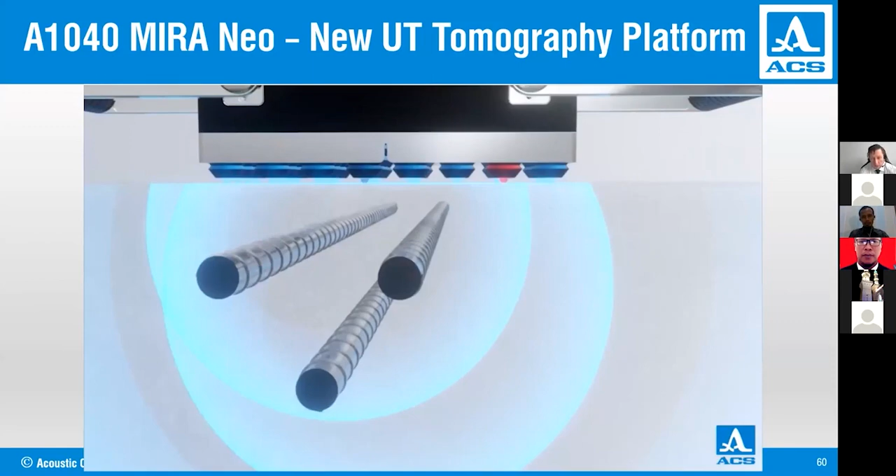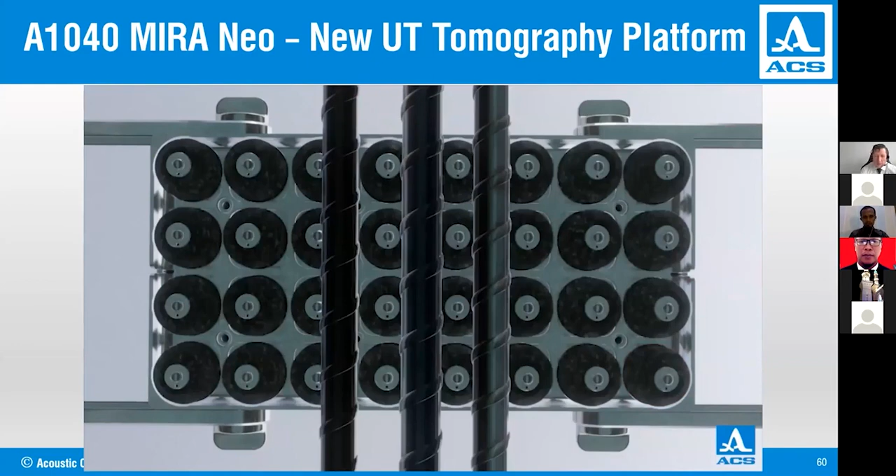Its principle will now be demonstrated. You see, each transducer is addressed independently, and all the transducers are in parallel receiving the data. That means at each position of the instrument, we can see 3D directly.

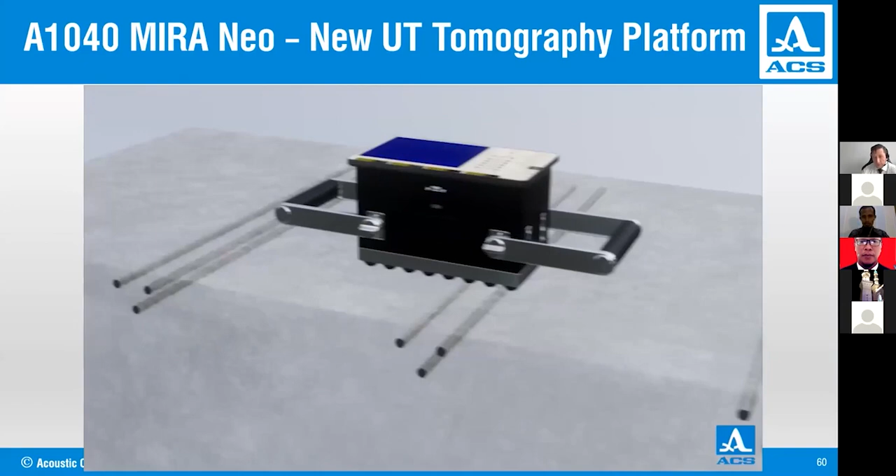By using a 2D map, similar to the current MIRA, but collecting 3D data at each position, we obtain 3D data sets, but with significantly improved sensitivity and resolution.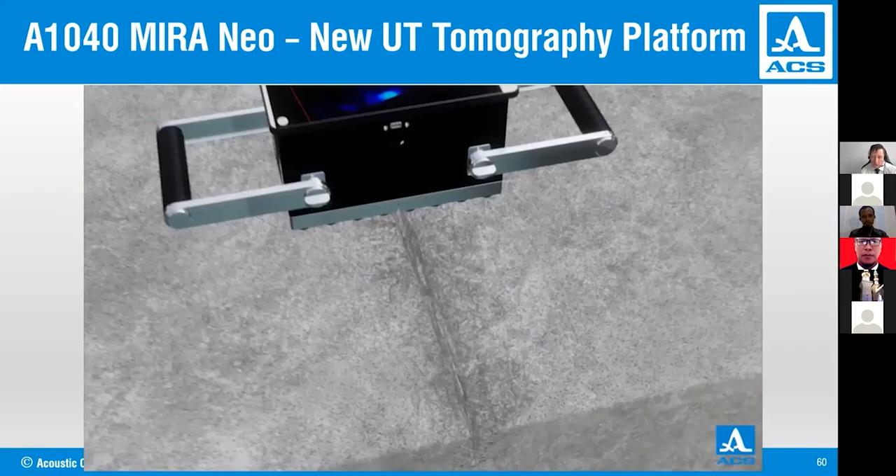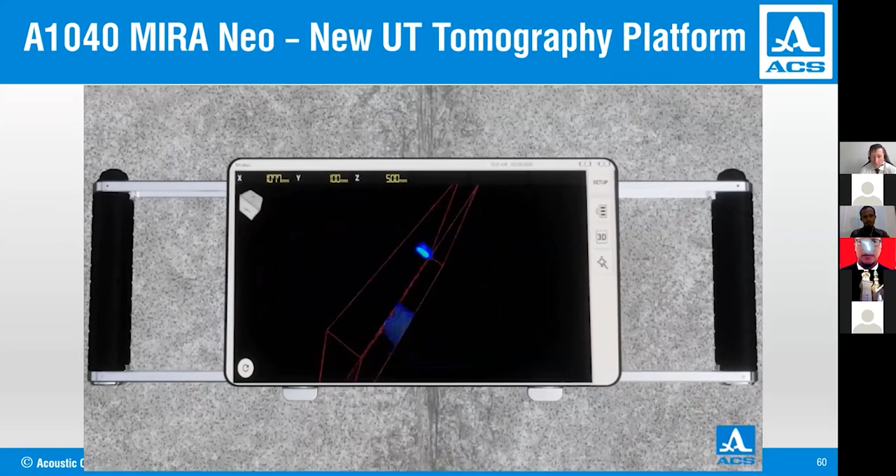The crack from last year - we obtain diffraction signals from the crack, and in 3D space we visualize the crack and measure its depth. This is the absolute novel functionality not available on the market yet.

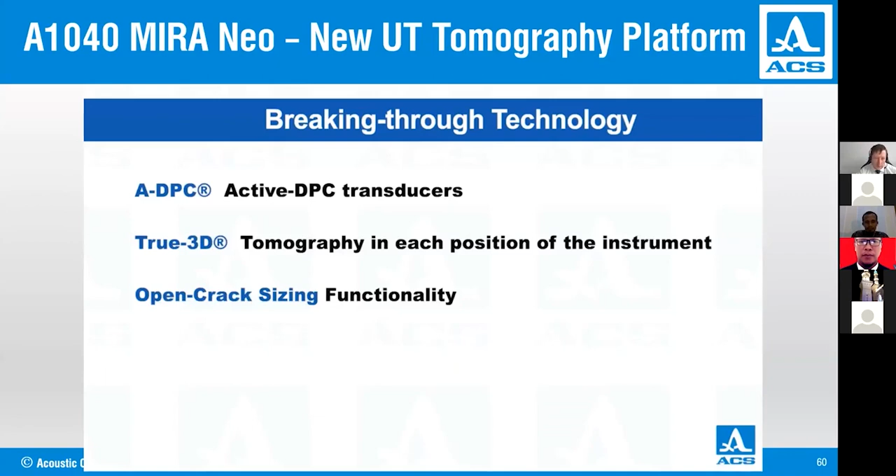I will summarize shortly. Modern instrumentation for concrete testing offers 3D tomography imaging functionality for wide range quality assessment of civil infrastructure. Of course, we should keep in mind all the limitations of UT, physical and organizational limitations, but we still believe that it is an emerging market and it will grow very fast in the near future.

Advanced signal processing and image reconstruction techniques like the mentioned 3D TFM will significantly improve the information content of UT in concrete, and ultrasonic testing of infrastructure by means of DPC instruments reveals a market for civil engineering and service providing in this field. I thank you very much for your attention.

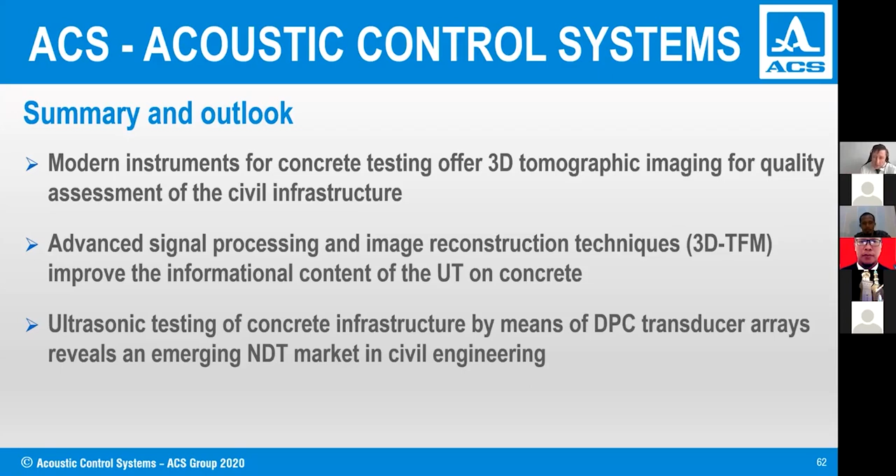If we have one-side access and we have a more or less homogeneous material with this one-side access, and then we have some foreign inclusion or empty space, the only thing which affects detectability is the size of this space. Generally speaking, I would say if the size is sufficient, we can detect it. But once there's some limited accessibility or some rebars behind or in between, it should be evaluated accordingly. If we talk about particular applications and inspection tasks, it is always good to provide at least a cross-sectional image or sketch where we can evaluate if UT has chances to be applied or not.